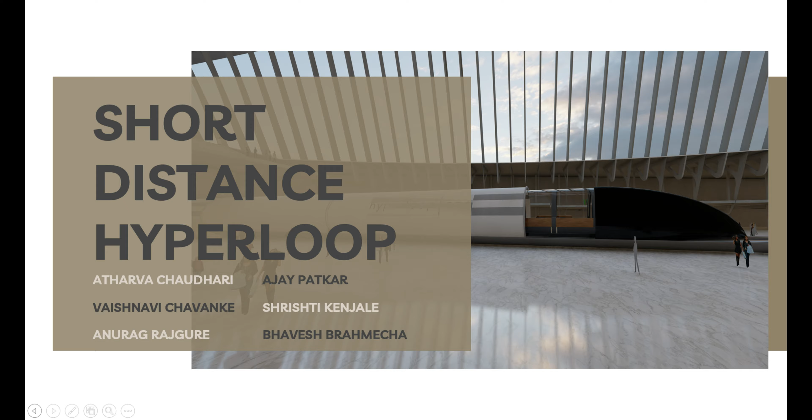Spectrum Technology consists of six construction management students. We operate out of NYU Tandon School of Engineering.

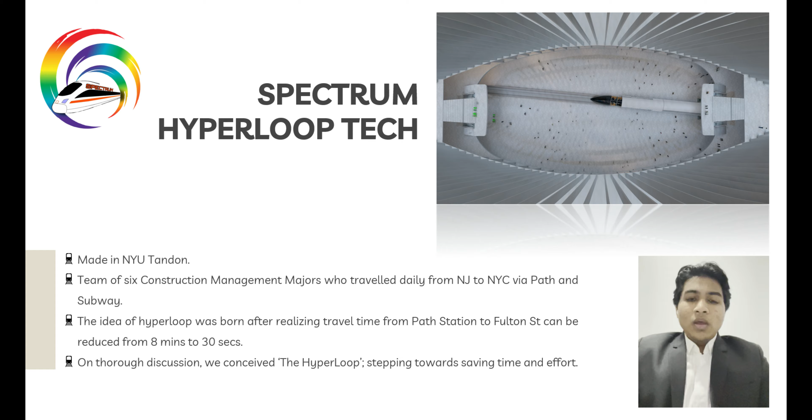We came up with this idea while thinking about the time taken to walk from WTC PATH Station to Fulton Station, which is about 8 minutes. On an average weekday, more than 10,000 people travel back and forth from Fulton to PATH Station. With the help of this project, we will be reducing the travel time, cutting down the commute to merely 30 seconds, all at an affordable price of just 99 cents.

Again, the time taken to walk from WTC PATH Station to Fulton Station is about 8 minutes, and more than 10,000 people travel back and forth between the two stations on an average weekday. With the help of this project, we will reduce that travel time down to merely 30 seconds.

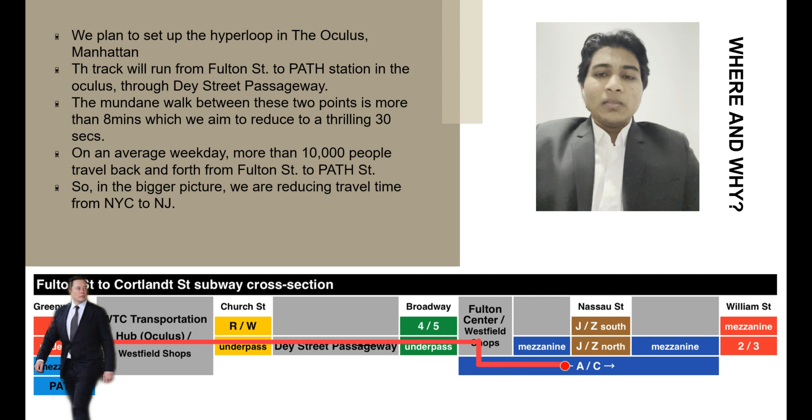This will also be a piece of art in the heart of Manhattan. Moving on, our architectural head Vaishnavi Chavanke will explain the detailed concepts of the design.

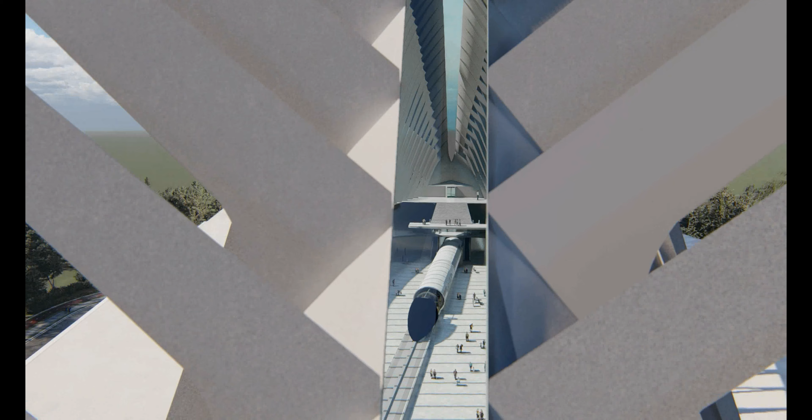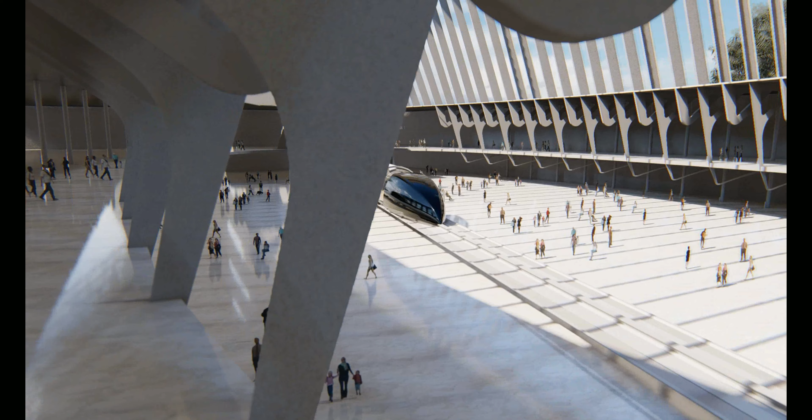Imagine traveling non-stop at up to 670 miles per hour, above land or underground. This is Hyperloop, a new mode of transportation that has been developed. Hyperloop is the first new form of public transportation in over 100 years. Fundamentally, it will change the way we travel, work, and live. Welcome to the future. Welcome to Hyperloop.

Now let's see how Spectrum morphs dreams into reality. The Hyperloop portal design is intended to bring the new age, revolutionized Hyperloop system to the people through architectural speech.

Talking about the main function of the project, which is connecting one mode of transportation to another — the Fulton subway station to the PATH subway station — design is not about how it looks or how it feels, it is all about how it works.

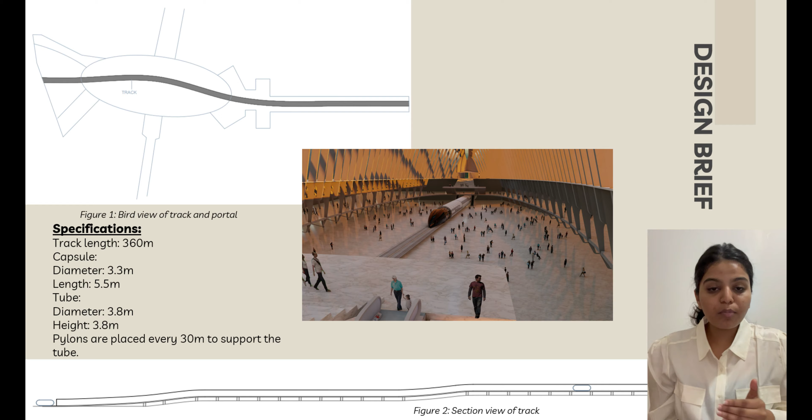Our Alpha Hyperloop vehicle moves autonomously through a low pressure tube along the atrium of the oculus without disturbing the circulation. The electromagnetic propulsion system makes the transit energy efficient and completely CO2 neutral.

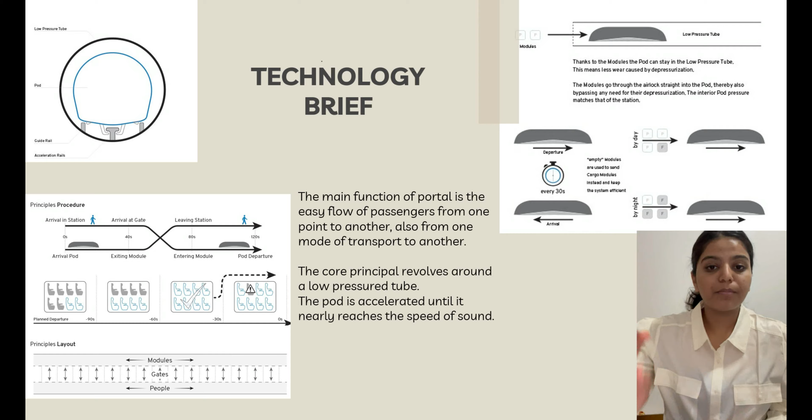Our Hyperloop spans 360 meters, with tube and capsule diameters of 3.8 and 3.3 meters respectively. The track is supported by 12 pylons spaced 30 meters from each other. Now I hand it over to our estimating team.

We had a daunting task of building a vision on a tight budget of $10 million. To meet the scope of work, we had to come up with various ideas to cut costs. One such idea was to rent a pod instead of manufacturing it, and we are renting a pod from Tesla. All the systems are made compatible with the Tesla pod model.

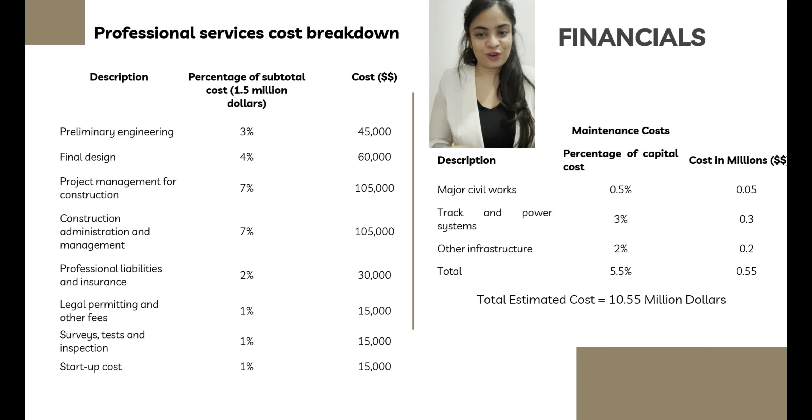If you take a close look at the maintenance costs, again it's the tracks which take up the largest chunk. Our maintenance has come down to 5.5% of the total cost, and we were able to fit this huge Hyperloop project on budget only because of our choice of technology — passive magnetic levitation and a linear motor system. The total budget of the project has come down to around $10.55 million, approximately $11 million, and I think that's quite a win.

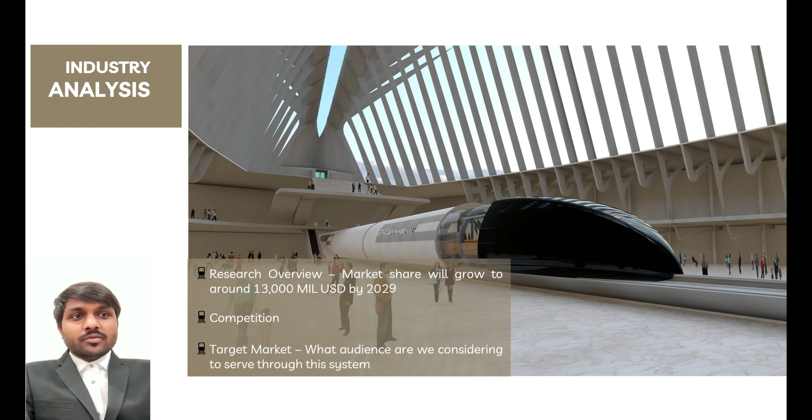As per the data, the Hyperloop technology market is expected to gain market growth from 2022 to 2029. Research says it will reach USD 13,322 million by 2029. The rising requirement is being fulfilled by using Hyperloop technology, as it offers breakneck speed of transportation, twice that of aircraft, with lower power consumption.

From the Gantt chart, we can see that the project is planned to start from December 7, 2021 and end on 13th June 2022.

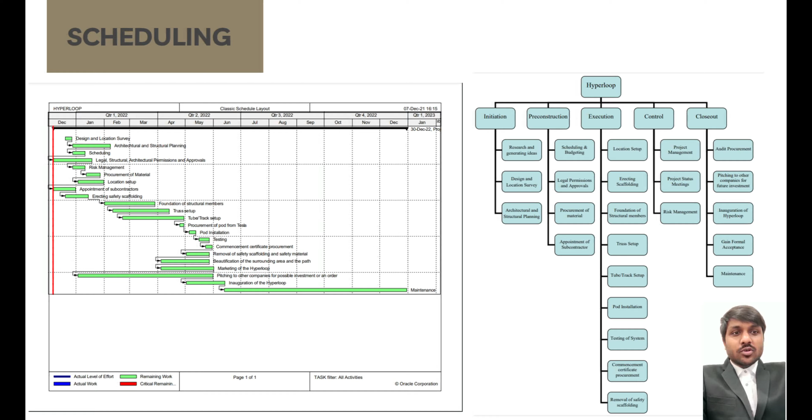We have 5 phases, in which the first phase is initiation and planning, which will take 40 days to complete. Secondly, the pre-construction will last for 72 days, and the third phase of actual execution of setup will take 190 days. The fourth and fifth phases include control and project closeout, which will take around 40 days to complete. Next, I'll explain the SWOT analysis of the project.

The strengths are reduced travel time, earthquake resistance, reduced friction and drag resistance, and less area required compared to other transport. Weaknesses are safety and security concerns, land acquisition, and bends or turns slowing it down.

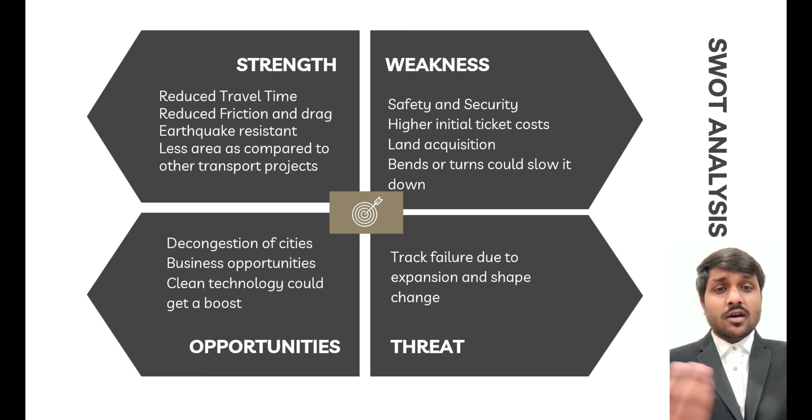Opportunities include easing the congestion of cities, new business opportunities, and a boost for clean technology. The threat is that due to steel track use, it can expand and change shape if the outside temperature changes, which will lead to failure.

At Spectrum Tech, we are a team of 6 professionals, with Port Authority being our parent company. For the short distance Hyperloop, we intend to do a joint venture with Tesla. We plan to rent the pod on a yearly basis instead of a direct purchase. This won't just be cost effective, but will also help us upgrade the technology every year.

Dey Street Passageway, where the Hyperloop is to be installed, built by MTA, connects 5 subway stations to the PATH station. Since we are partnering with MTA, passengers can use the same MTA MetroCard for payment at our portals.

This is a diamond model and a spider diagram of our risk analysis. We have assessed novelty and pace parameters as medium to low risk, whereas technology and complexity are high risk aspects.

Let's take the novelty parameter as an example. Although the short distance Hyperloop is a whole new concept, we do have a platform to work on since the human trials for long distance Hyperloop have already been successful.

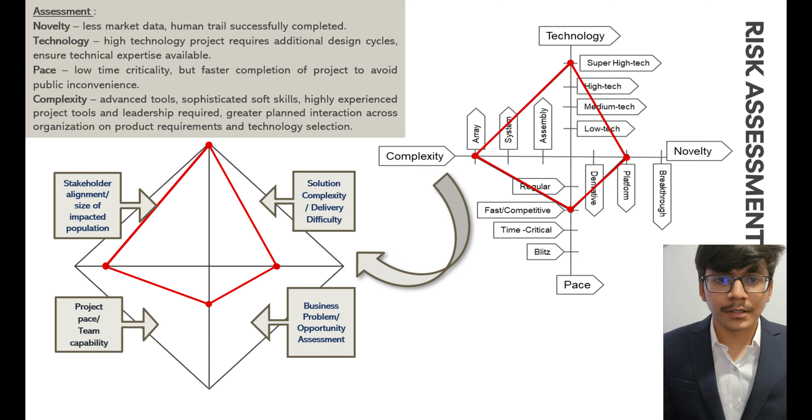To eliminate the high risk factors, Spectrum's research and development team is conducting extensive research by simulating every possible casualty in this transit system. Overall, we have assessed this as a medium risk project.

Now over to our marketing head, Anurag. At the heart of the public transit industry lies marketing campaigns which help in boosting service awareness and safety accessibility for all passengers. We intend to create innovative marketing strategies reassuring the safety of transit for the catered demography.

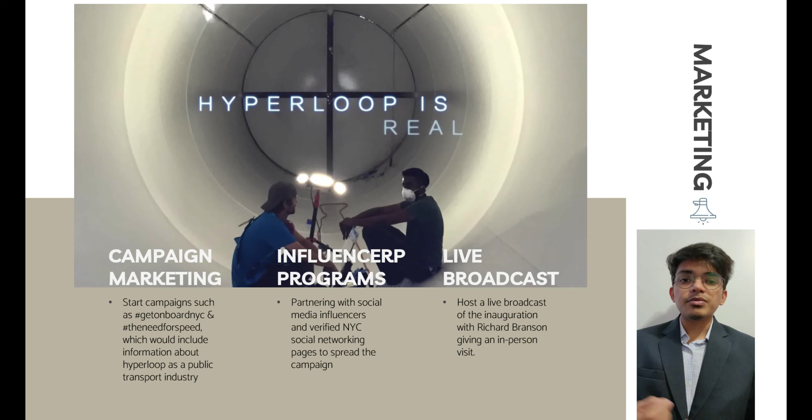Banking on the vast reach of social media platforms like Twitter and Instagram, we hope to introduce hashtags like GetOnboardNYC and NeedForSpeed, which would appeal to our target audience about the pros of a Hyperloop over regular transit systems. These hashtags would lead users to more information about the affordability and sustainability of the teleporting system. The campaign would emphasize that it's not just for the rich and wealthy, but for all the average Joes.

Our next step in the marketing strategy is launching an influencer program, where social media influencers would promote our campaign by sharing their personal experience on our thrilling ride.

The next step is having a live broadcast of Mr. Richard Branson being the first passenger of the Ride to the Future, an inaugural event on YouTube. After the grand inauguration of Oculus Hyperloop, these are the locations where we plan to teleport you next.

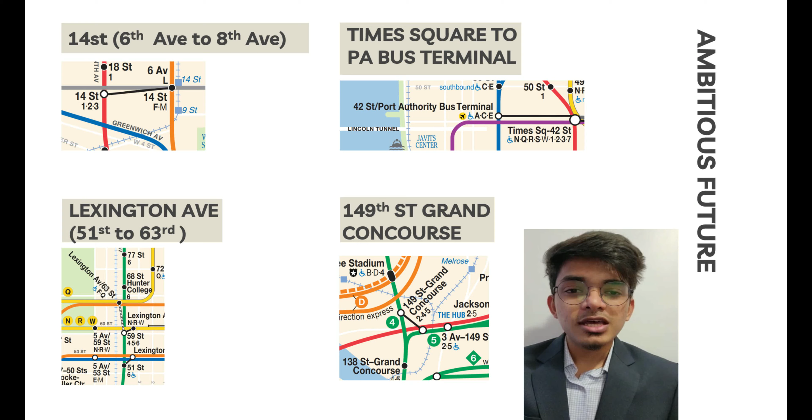Time is money, and since you are saving your time, you just gotta spend around $1 per trip for us.